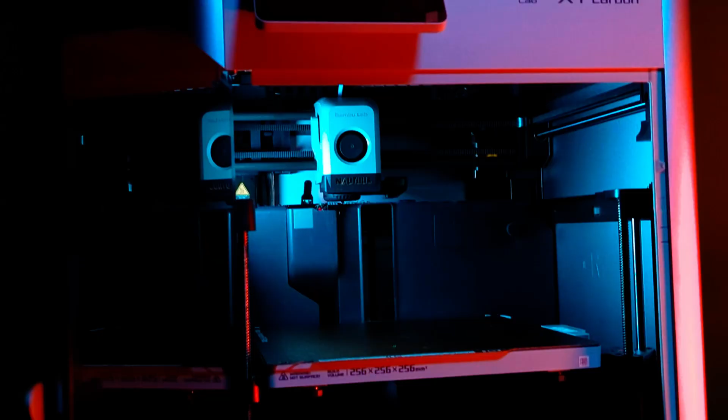I've been a 3D artist for the last 15 years, working in the games industry for the last 8 years, and it's about time I gave 3D printing a try, so I got my hands on this X1 Carbon.

I'm not going to go through a whole unboxing thing because I've already unboxed it and I don't want to put it back in the box, and there's already plenty of YouTube videos out there unboxing 3D printers. So I'm going to just go straight into actually trying to make something because I don't really want to download everything off MakerWorld.

I've managed to go through my whole 3D career so far using 3ds Max, and it's only recently that I've started learning Blender. So I thought something simple would be a good place to start, and I quite like steampunk things, so I thought I'd make a little steampunk gear for this tea light.

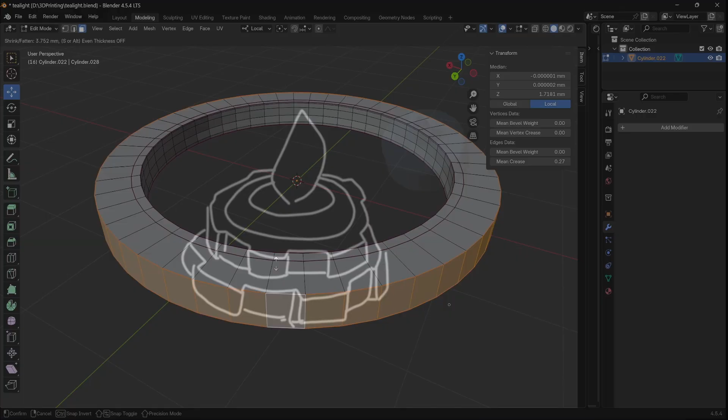To start I used the cylinder, and then I hollowed out the middle. I also tapered the edge just in case I could have a bit more tolerance for the tea light itself and I could push it into the model.

And then I was just using the extrude tool and scaling to try and make out the kind of gear shape. I was also adding the edge loops with the quick loop tool and more extruding. I did forget how to select every other face, because I'm sure you can do that, so I'll have to work on how to do that.

Another thing I wanted to do was add in a little groove in the top so that I could possibly press in another part on top, build something up like that, rather than doing everything as one whole print. I also like to experiment with just making stuff you can actually connect together, like building things up.

And then the last thing on this model, because it was pretty small, I needed to make it a bit taller because the tea light itself was about 2 centimeters tall and my model started out not being that tall.

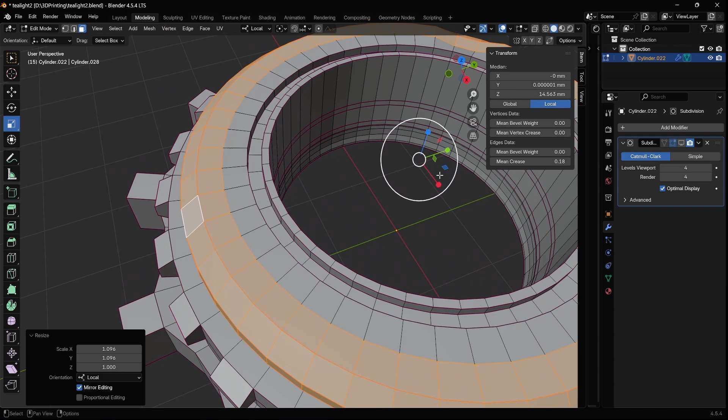After that I was just adding in the edges that I wanted to be sharper. So when I was subdividing, if you just blanket subdivide, it's going to be all mushy, but Blender actually lets you decide how much crease you want on each edge, which is really nice, because in Max I would just have to add extra loops to support the geometry, so this is much simpler to do.

And then once I had the shape that I wanted, save it out, and remember not to export the whole scene and just what I wanted selected, and then it was off to the slicer.

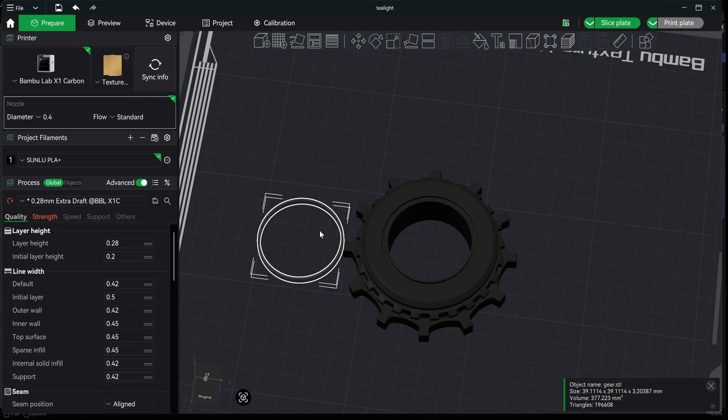So after exporting as an STL, making sure it was only exporting what I wanted it to, and making sure that my scale was correct, which was a strange thing, then there wasn't really a lot else to do. I didn't really have to change the settings. Gave it a quick look around, cheeky spin, and then it was printing.

So I've edited the design a little bit. Unfortunately the tea light wasn't really quite tight enough, so it was quite easy to knock out. So I've decreased the size of this inner hole a bit, added a bit more of this lip so that'll hopefully just catch the tea light and hopefully keep it held in place easier.

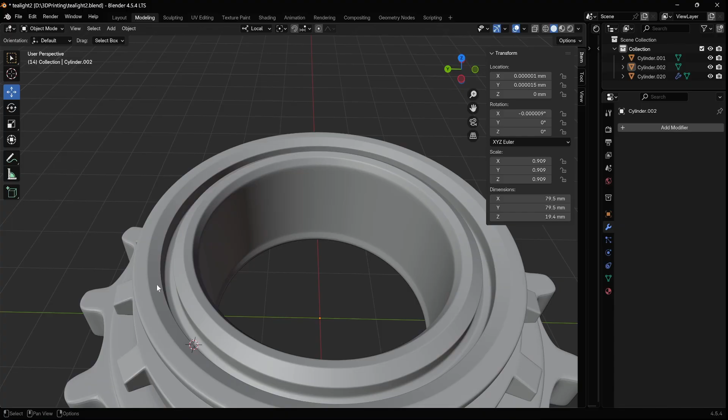I also added a bit more of a thicker groove in here so that I've got some more space to work with for adding another part to it on top, and hopefully that slots in well. And then just change the design of the kind of spikes a little bit because I wasn't quite happy with how they were originally.

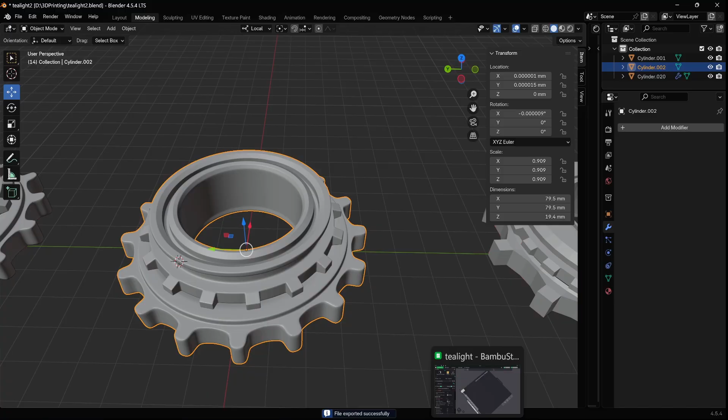So I'm going to just select this, export it as a STL, not an FBX. I'm going to do selection only, because if I don't, it's going to export everything in the scene, which I do not want. So now all it has to do is import, and there we go.

So what I have changed is the amount of infill I've got in here. I've turned it down to 2% because it's tiny. So if I slice it, you can still see that it's got some of the support kind of...

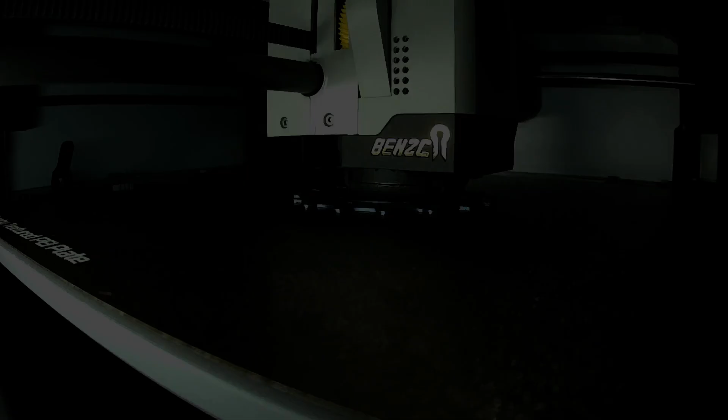And then I can hit print. I did it in draft mode, so I think the quality could have been a little bit better, but considering how small it is, I think it's really nice. And this metallic PLA was a really good choice because I think it really fits the steampunk style I was going for. My tea light just slots in there perfectly, which is fantastic, and that is very satisfying.

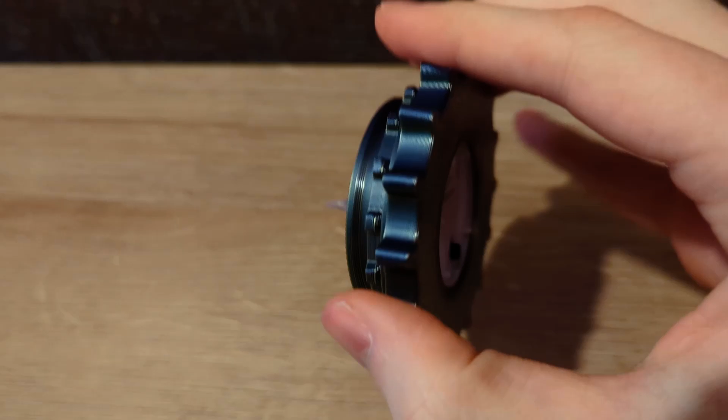That's almost as satisfying as seeing something I just sketched out a few days ago.